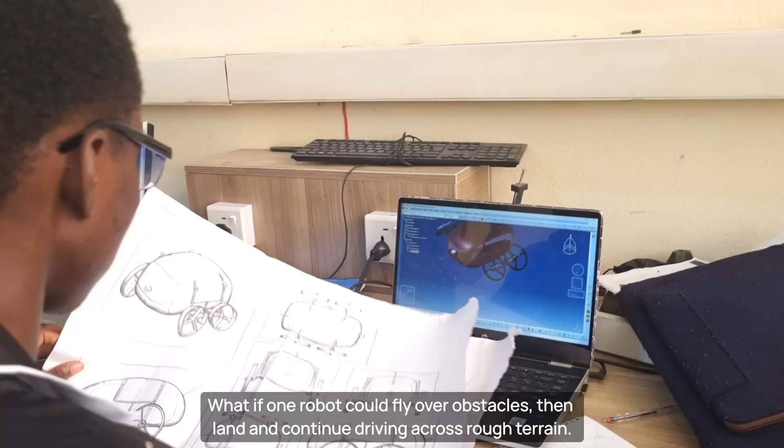What if one robot could fly over obstacles, then land and continue driving across rough terrain? That was our original vision. The problem was, we had no idea how difficult that would actually be.

When we first started this project, we weren't thinking small. We wanted to build a robot that could transform between an unmanned aerial vehicle and an unmanned ground vehicle. Imagine landing after a flight, folding its arms automatically, switching configurations and continuing its mission on the ground. That sounds futuristic, and honestly, that was why we loved the idea.

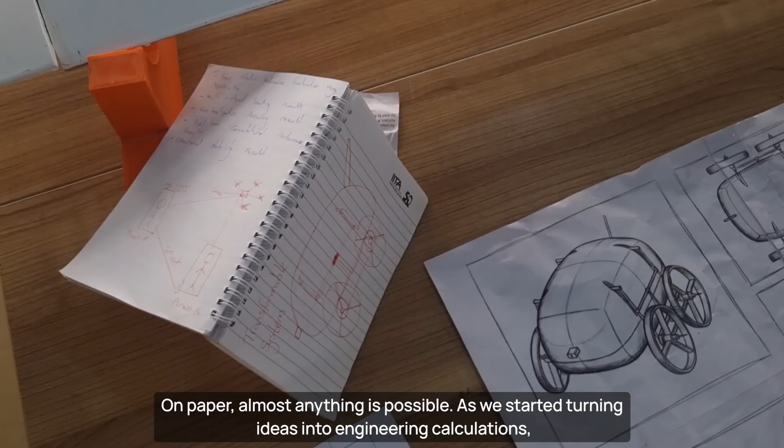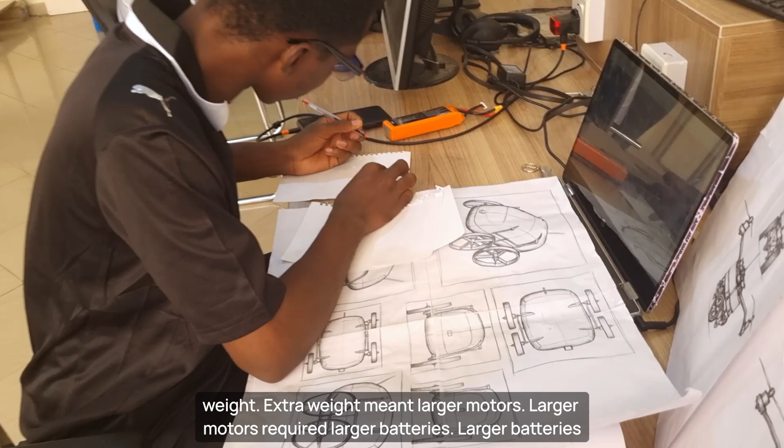On paper, almost anything is possible. As we started turning ideas into engineering calculations, reality began to catch up with us. Every additional moving mechanism meant extra weight. Extra weight meant larger motors. Larger motors required larger batteries. Larger batteries increased structural requirements, and every new subsystem increased costs, manufacturing complexity, and the chances of failure.

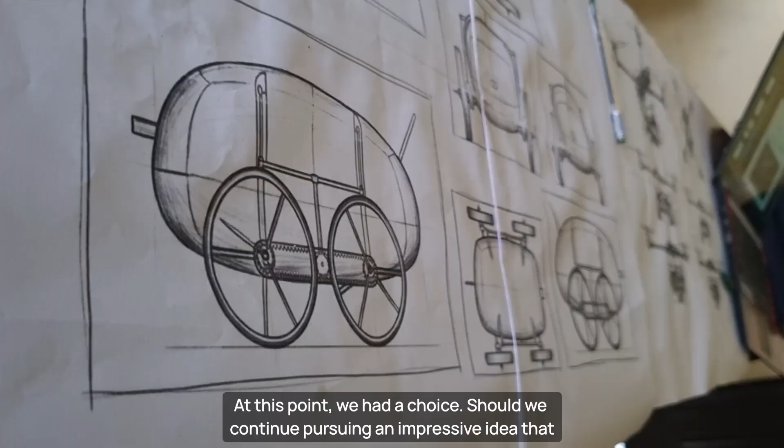This was one of our first major engineering lessons: every design decision affects 10 others. Nothing works in isolation. At this point, we had a choice. Should we continue pursuing an impressive idea that carried significant technical risk, or should we redesign the system to maximize the chances of delivering a reliable working prototype?

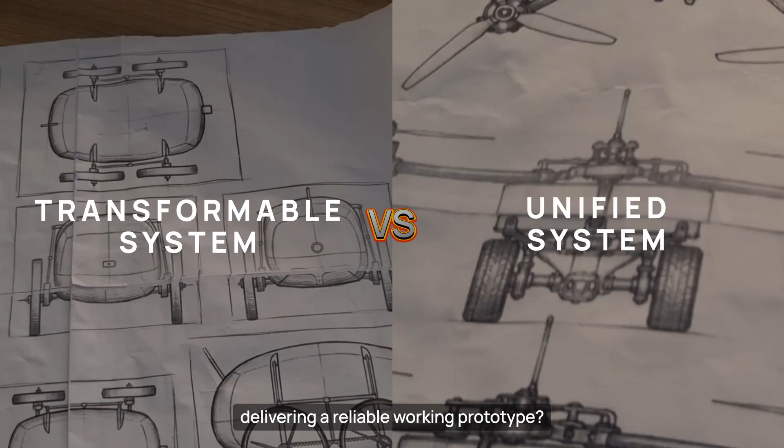This wasn't accepting defeat, it was engineering. Instead of creating a transformable platform, we designed a unified system where the UAV and UGV worked together as one integrated vehicle. This single decision simplified almost every part of the project. Looking back today, I still believe our original concept is achievable, but not within the constraints we faced as engineering students. You see, engineering isn't about building the most complicated designs or systems, but building the right one.

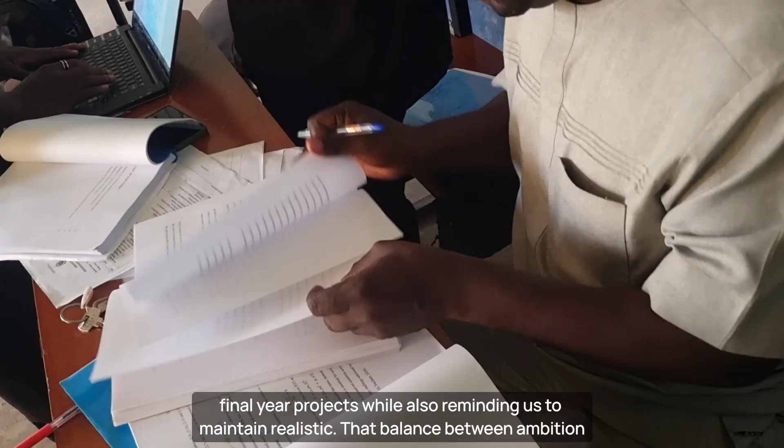Fortunately, our supervisor immediately supported the project. He encouraged us to think beyond conventional final year projects while also reminding us to stay realistic. That balance between ambition and practicality became one of our defining principles throughout the project.

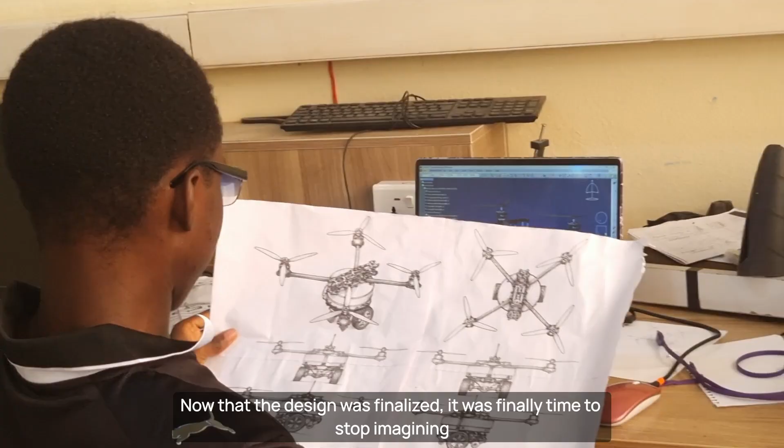When building your own engineering projects, don't become too emotionally attached to your first idea. Be willing to simplify, be willing to redesign, and most importantly, let engineering evidence guide your decisions. Now that the design was finalized, it was finally time to stop imagining and start building.